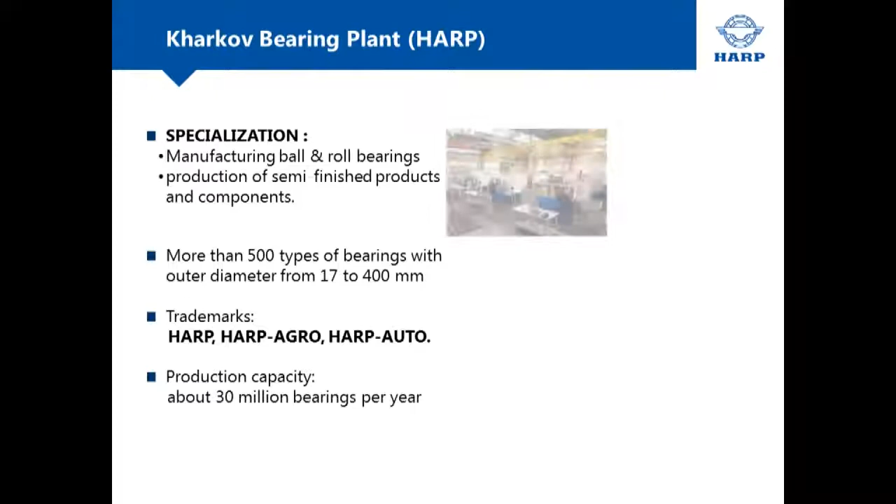Kharkov Bearing Plant, formerly GPZ-8, is the CIS leader in manufacture of bearings for agricultural machinery building companies and a key supplier of railway bearings and bearing units. HARP is specialized in the production of ball bearings and roller bearings, semi-finished parts and components.

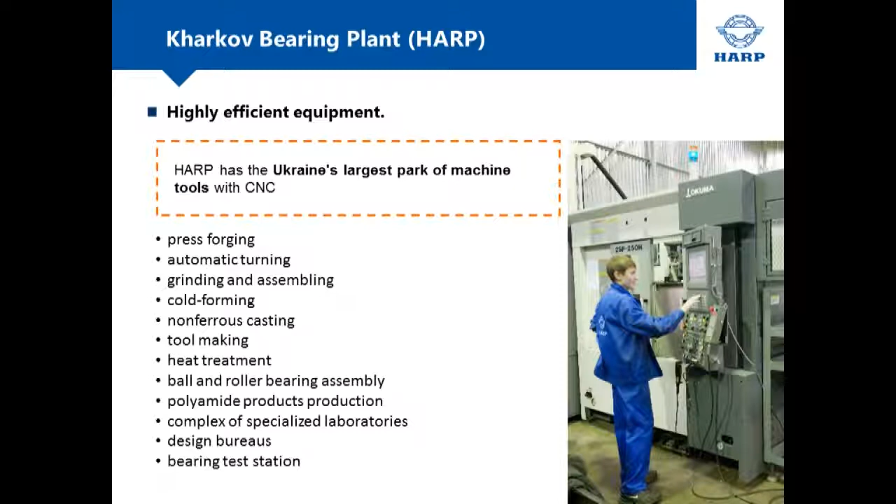The plant manufactures products under the HARP, HARP Agro, HARP Auto, HARP Agri Unit trademarks. All products of Kharkov Bearing Plant are manufactured on domestic and imported high-precision equipment. Moreover, HARP has the largest park of computer numerical control machines in Ukraine. You can find more information about machinery and manufacturing facilities of HARP in the video about our company.

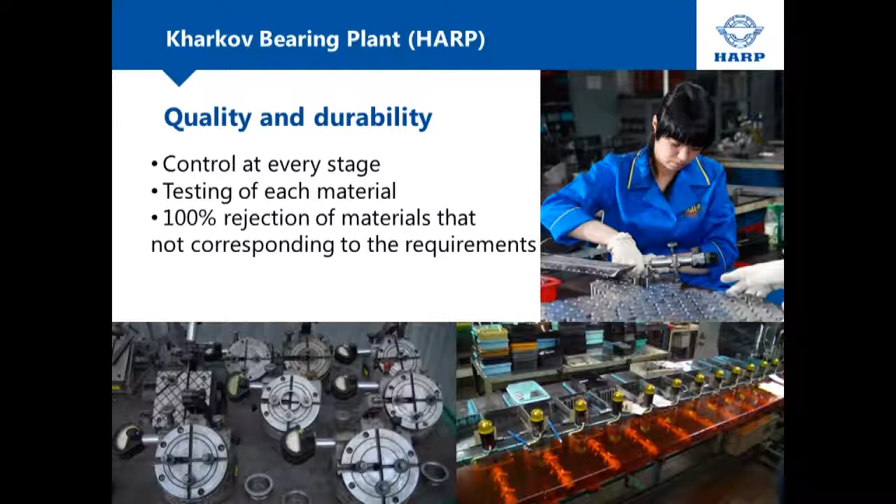High quality and durability of bearings are provided through a complex of measures. If deviations from relevant standard requirements are detected, the materials are not allowed to be used in production. Output products correspond to the international standard ISO 492 and interstate CIS standard GOST 520.

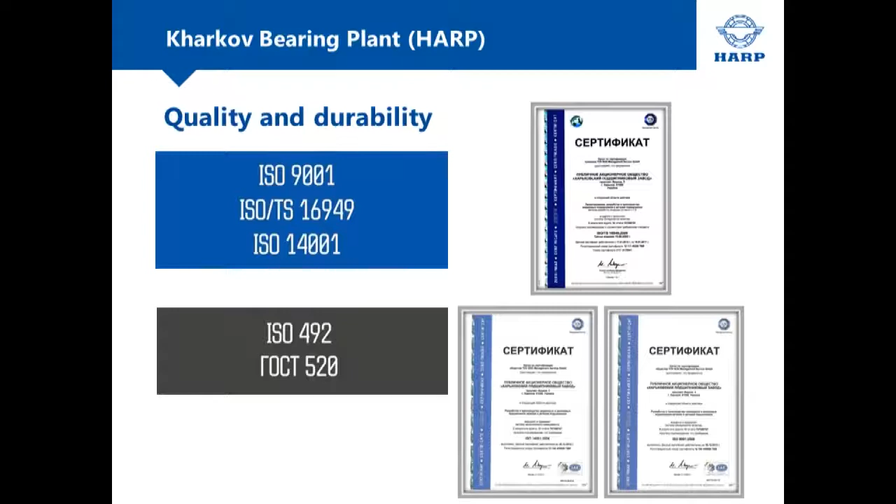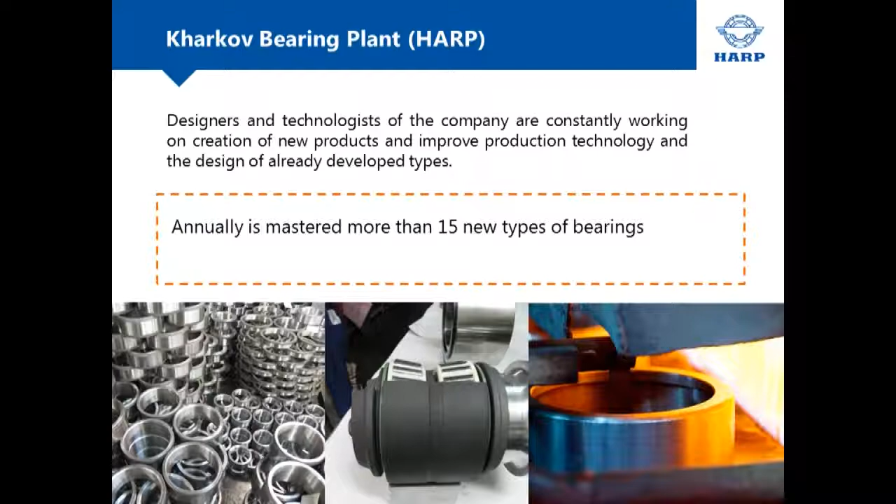Usage of effective seals. At the design stage, we raise requirements for bearing structure compared to normal accuracy class. For HARP bearings, we use ultra-pure steel with a reduced oxygen content share. The design with an optimized raceway radius has dynamic load capacity increased by 5% compared to the standard version, as well as durability increased by 16%.

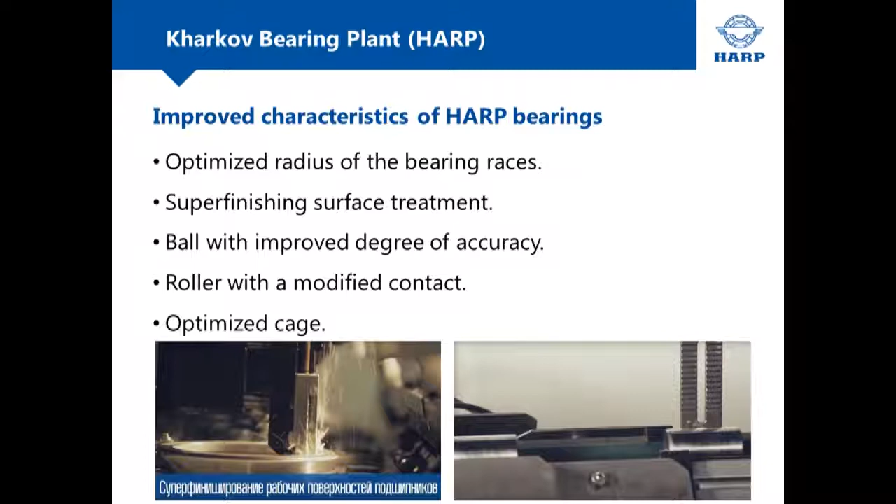Superfinishing surface treatment improves noise and vibroacoustic characteristics and increases durability. HARP bearings use balls with accuracy from 5 to 16 degrees. In HARP roller bearings, a cambered roller with a modified contact is applied, which improves bearing operational characteristics. Along with steel-stamped cages, HARP bearings also use massive polyamide and brass cages, which allow minimizing noise and vibration and increase bearing speed capability.

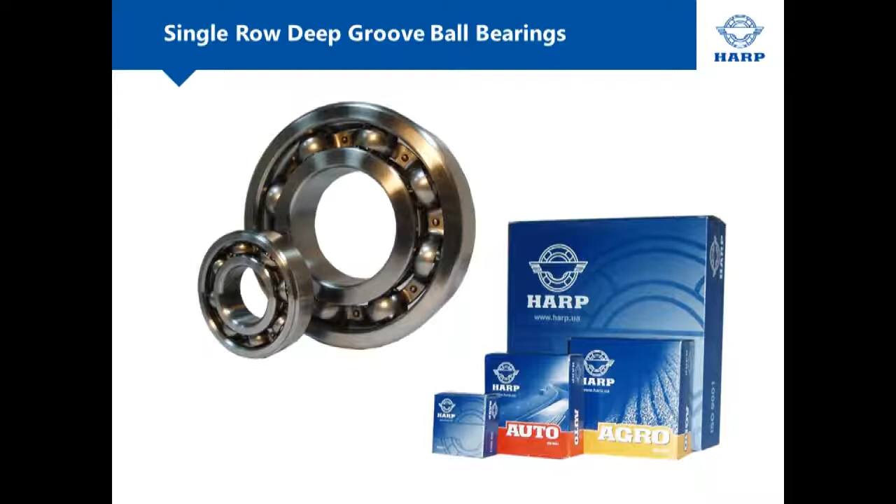Single-row deep-groove ball bearings are intended for operation under radial loads. They also accommodate axial and combined loads, especially with increased radial clearances. The number of structural varieties of these bearings is large enough, and most of them are standardized. To simplify the axial mounting of bearings, they can be manufactured with a groove on the outer ring, in which an adjustment spring ring is inserted during assembly. Design of separators of deep-groove ball bearings is also diversified.

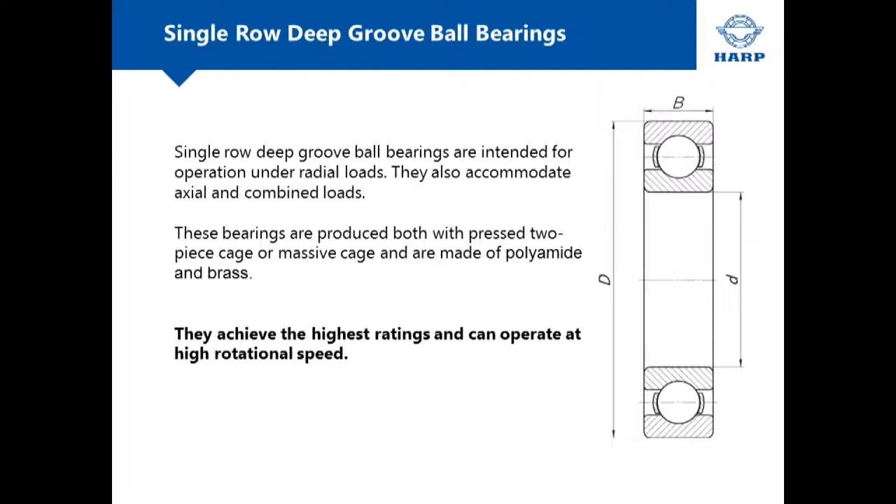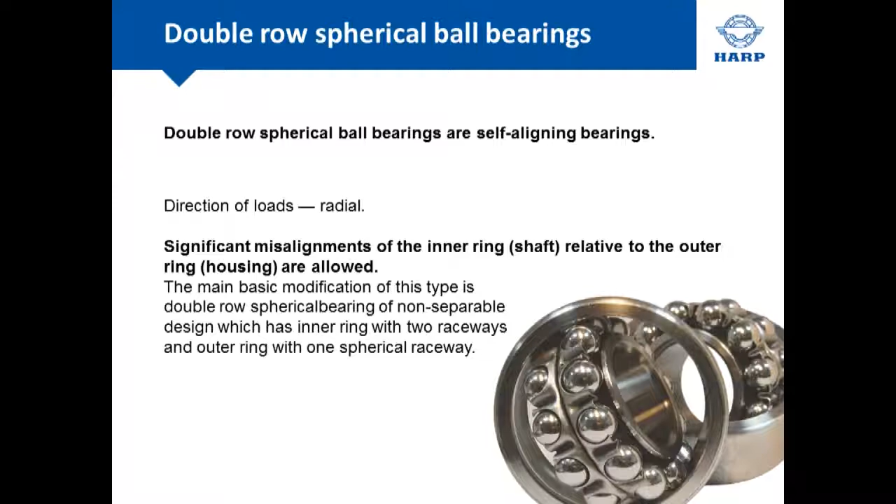Double-row deep-groove spherical ball bearings are intended for operation under radial and minor axial loads. Bearings fix the position of the shaft axially in both directions. Constructively, they consist of two rows of balls, the inner ring with two raceways, and the outer ring with one spherical raceway that allows the inner ring with a set of balls to rotate around the bearing center, that is self-adjusting. This ability allows them to be used at significant non-axiality of mounting seats and large deflections of the shafts. Depending on bearing series, the misalignment of axes may be in the range from 2 to 3 degrees.

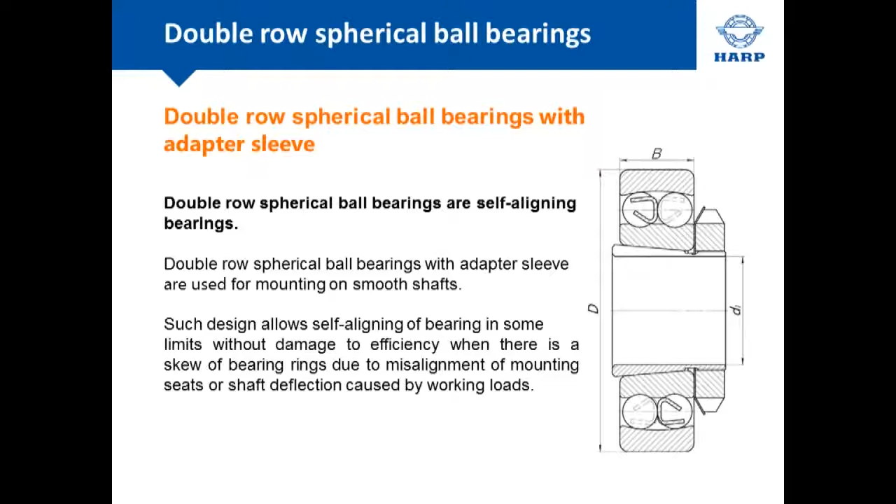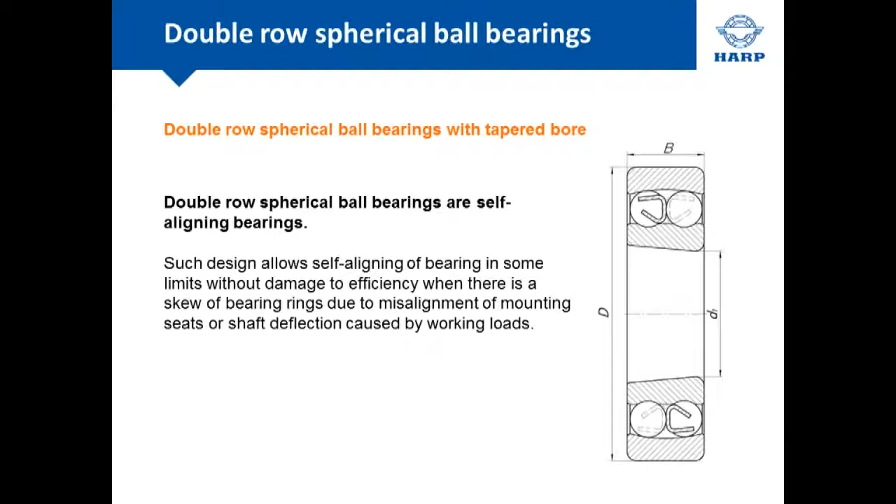Bearings could have cylindrical or conical bore of the inner ring. Bearings with conical bore packaged with adapter sleeves allow possibility of mounting on smooth shafts without fillets. Separators of spherical ball bearings are usually steel-stamped, but some types of bearings produced by HARP are equipped with polyamide ones.

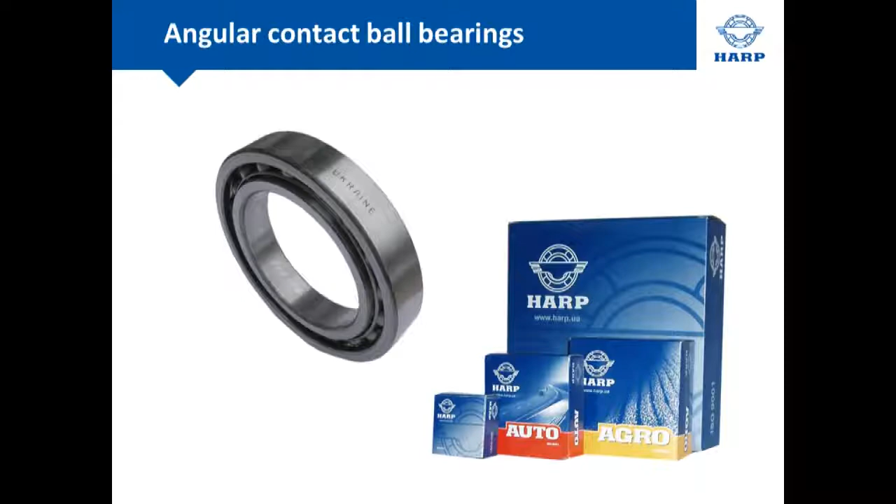Their axial load capacity depends on the contact angle. Angular contact bearings with 3- and 4-point contact can take axial loads in both directions. These bearings are mostly used at medium and high rotational speed. Angular contact ball bearings, which take only one-sided axial loads, require mounting of another bearing, fixing the shaft in the opposite direction.

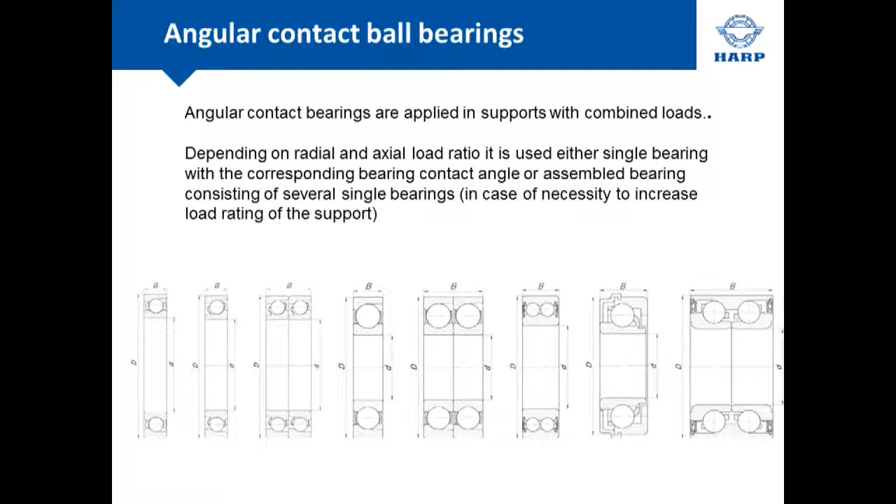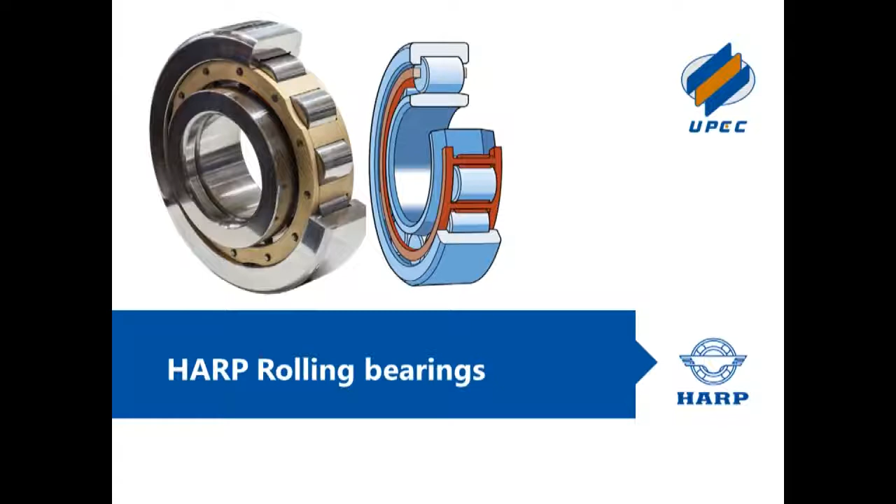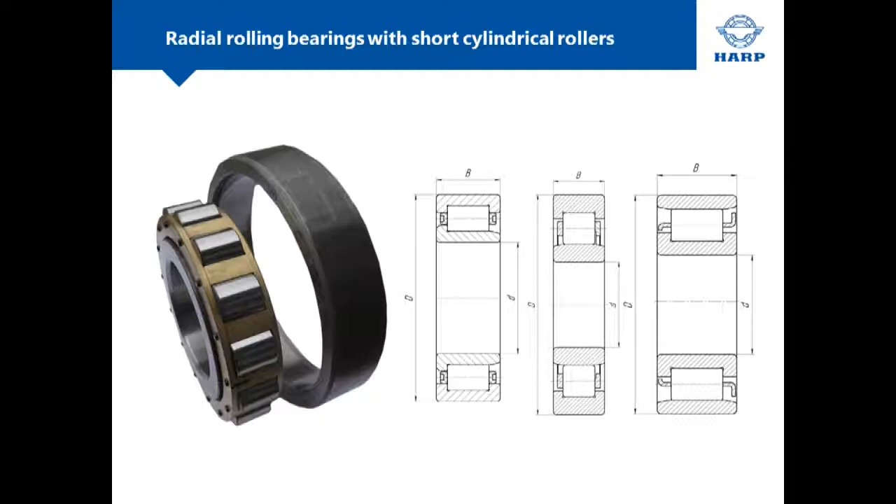Roller bearings. HARP is the only manufacturer in Ukraine and one of the largest in the CIS of cylindrical roller bearings with short rollers. Cylindrical roller bearings with short rollers are intended for operation under heavy radial loads. Their high rapidity is almost equal to single-row deep groove ball bearings. They require precise alignment of mounting faces. These bearings are used for mining and metallurgical complexes, for material handling equipment.

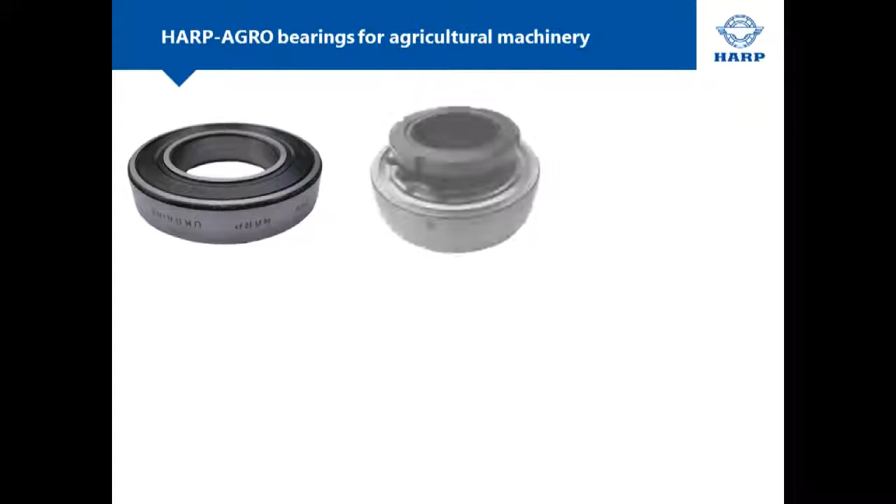HARP agro bearings for agricultural machinery. A special place in the product range of Kharkov Bearing Plant is occupied by bearings for agricultural machinery, as the plant was built for the needs of agricultural machinery. For more than 60 years, HARP has manufactured its products for farmers from the former Soviet Union region.

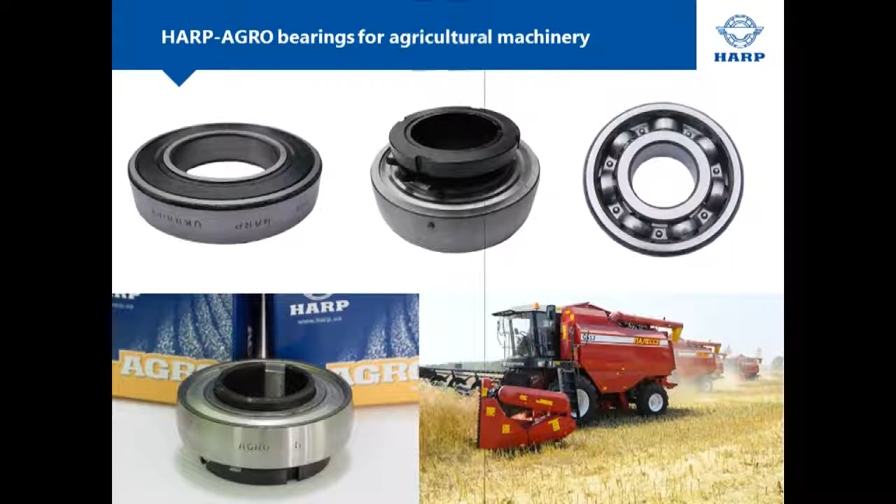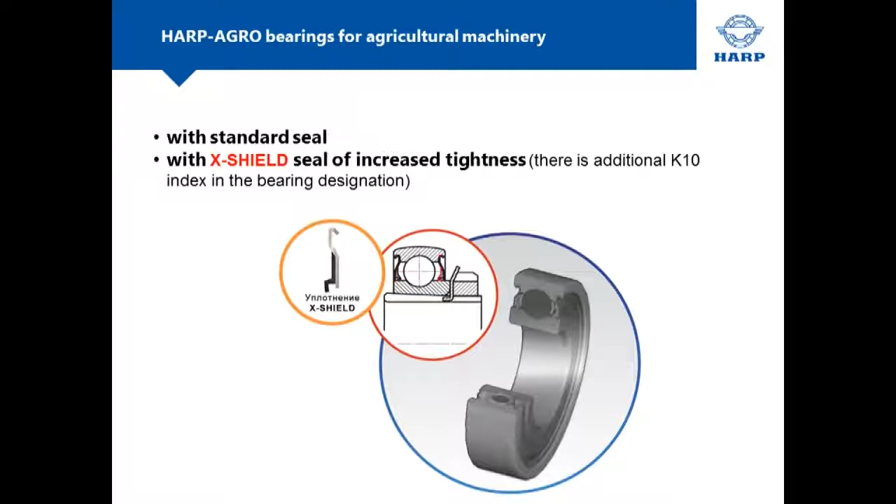HARP agro bearings for agricultural machinery can be produced with a locking pin to avoid rotation of the bearing in the housing. Both with standard seal and tight seal, which allows bearings to contact the dust environment and operate efficiently in extreme operating conditions of agricultural machinery. Both with standard stamped steel cages and polyamide cages.

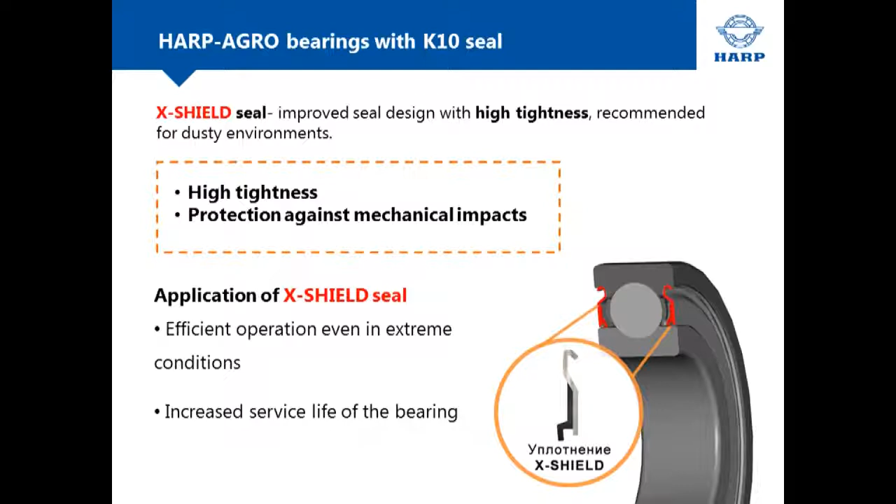We should also pay attention to bearings with seals of increased tightness K10. It's no secret that the majority of agricultural machinery work in severe environments with dust, dirt and moisture. Therefore, bearings for combine harvesters and tractors, in comparison with other machines, shall have a higher tightness. The outer side of seal K10 is metal, so in the operation of a combine harvester, the straw mass cannot damage the seal or fall into the inner bearing cavity and interfere with its normal operation.

HARP agro bearings today are highly appreciated by leading manufacturers of agricultural machinery in the CIS, including Rostselmash, Gomselmash, Bobruisk plant of tractor parts and units, Minsk tractor plant, and Borisov plant of aggregates.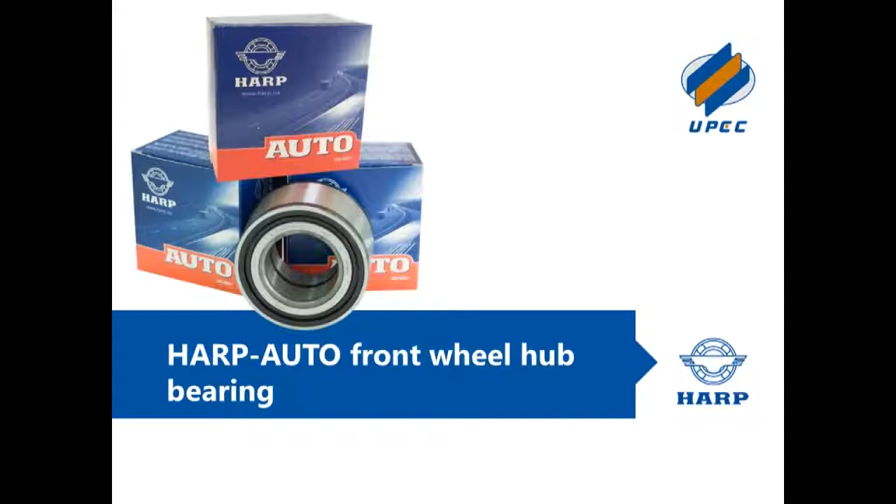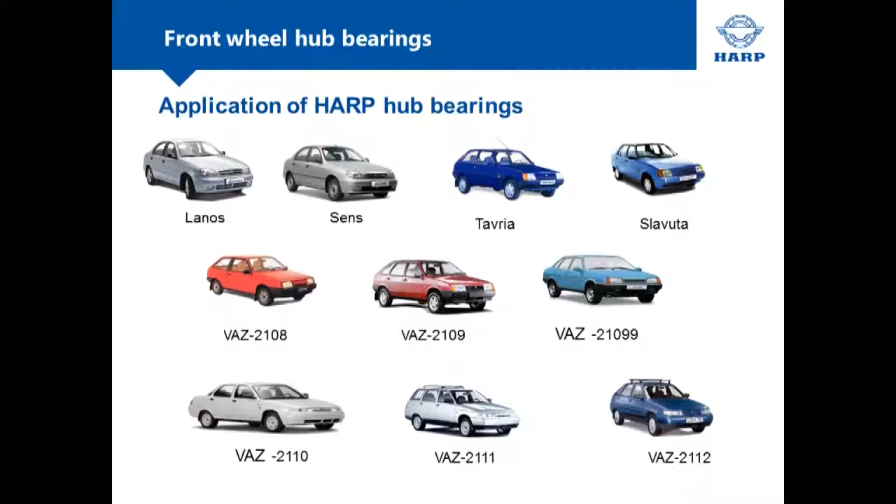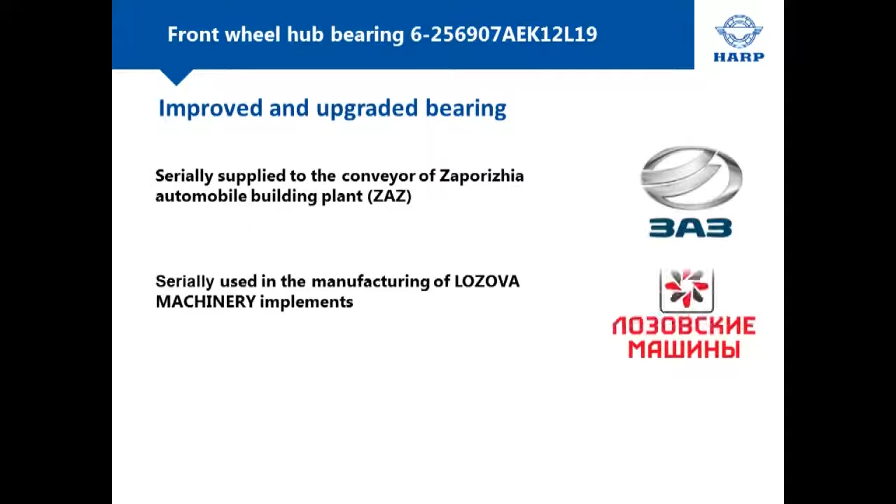Front wheel hub bearing HARP Auto. Kharkov Bearing Plant is one of the main suppliers of bearing products for the conveyor of joint stock company ZAZ. Since 2011 we have been supplying modernized front-wheel hub bearings for cars such as Lanos, Sens, Tavria, Slavuta, and Vaz. The upgraded hub bearing is successfully used in manufacturing agricultural implements, in the maintenance-free bearing unit HARP Agro Unit for disc harrows and cultivators.

Designation of the modernized bearing is 6256907 AEK12L19. This bearing has significantly improved characteristics on durability and efficiency, compared with 6256907 AE1K1C17, earlier serially produced.

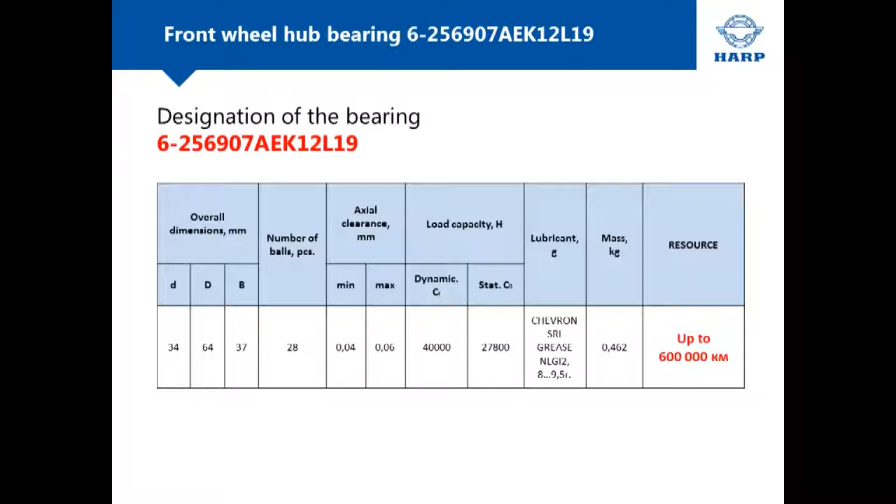Improved characteristics on durability and efficiency of the upgraded bearing 6256907 AEK12L19 are achieved by means of production of bearing rings from hot-forged billets. Usage of the upgraded hub bearing 6256907 AEK12L19 allows increase of durability, increase of tightness, reduction of the level of vibration and noise, and increase of the speed characteristics of the product.

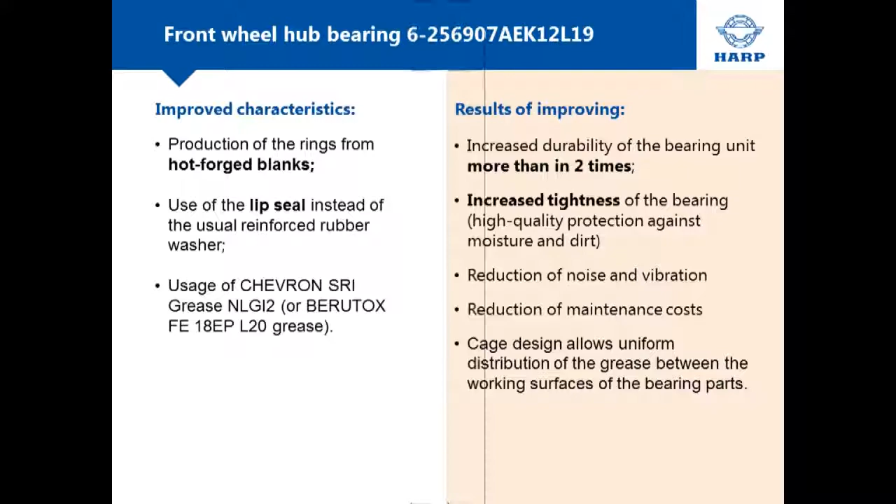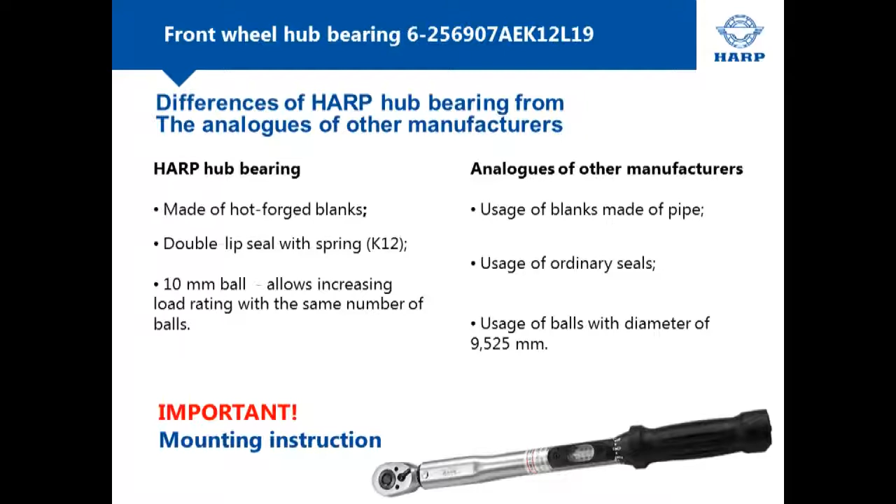The difference between hub bearings and the products of other manufacturers: please know that during mounting of hub bearing, the operating instructions should be strictly fulfilled. It is necessary to use special tools, strictly observe the tightness of the nuts, and use a torque wrench.

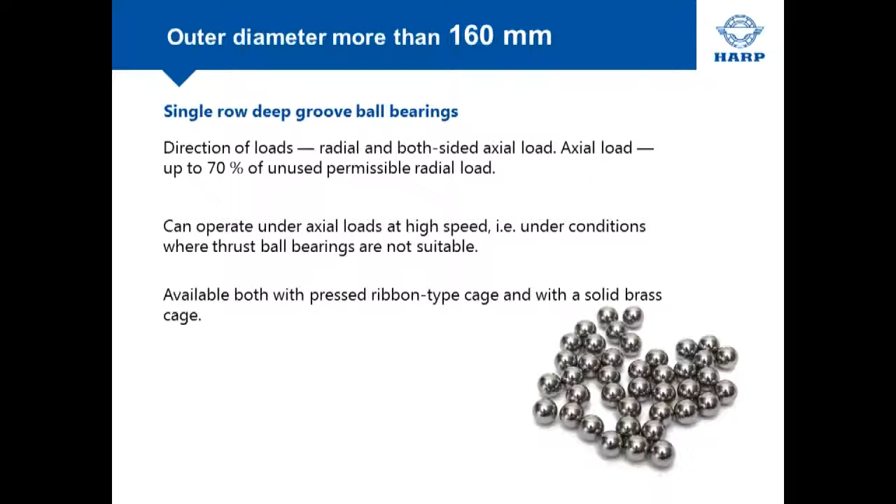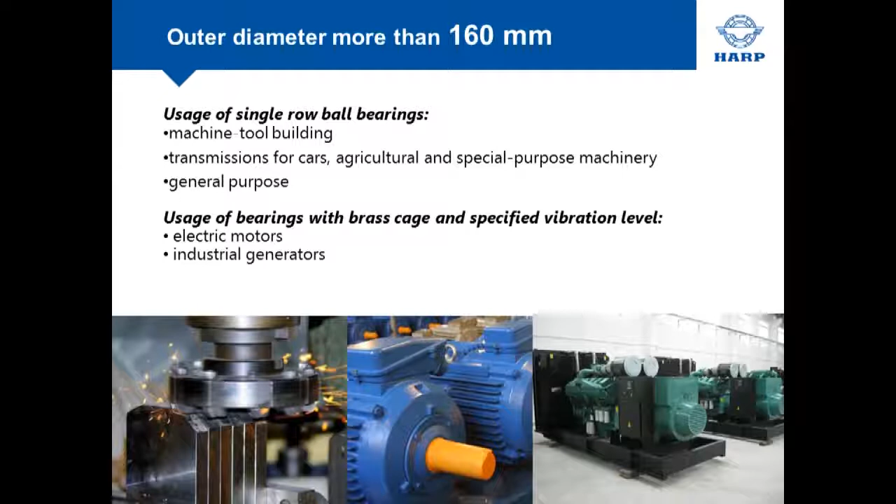The types of bearings implemented from 2010 to 2014. From 2010 to 2014, lots of popular bearings were designed and launched into mass production at Kharkov Bearing Plant. For example, single-row deep groove ball bearings with outer diameter more than 160 mm. Areas of application of these bearings are machine tools industry, transmissions for auto and agricultural industries, special equipment, and general industrial usage, including application of bearings with brass separator in defined vibration level, electric motors and industrial generators.

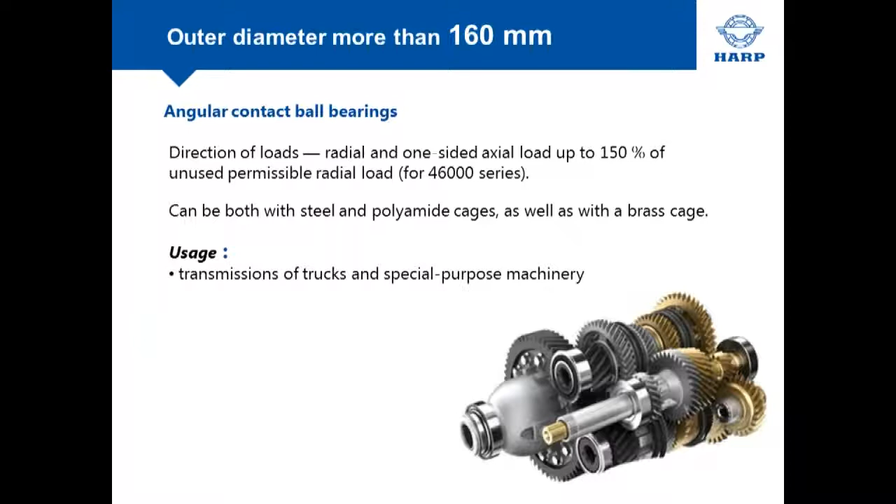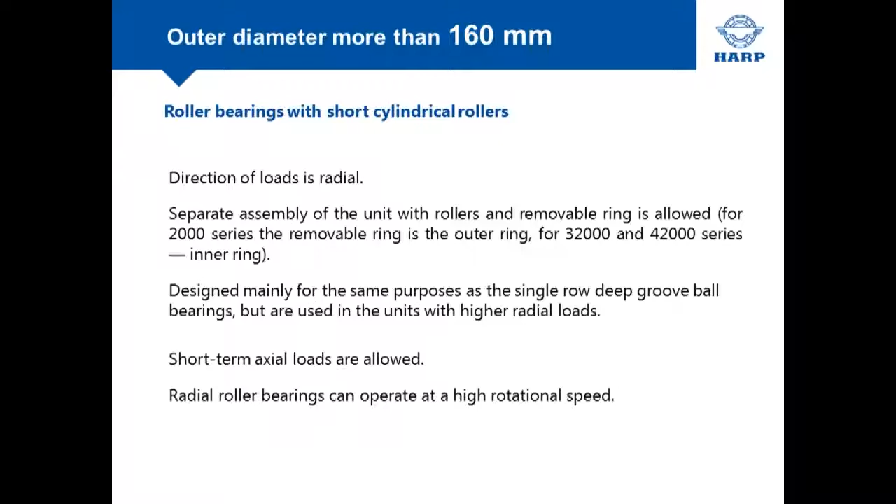Angular contact ball bearings with outer diameter more than 160 mm are used in transmissions of trucks and special machinery. Cylindrical roller bearings with short rollers with outer diameter more than 160 mm: the direction of bearing loads is radial, while short-term axial loads are also allowed. Areas of application of these bearings are mining and metallurgical complexes and lift and carry handling equipment.

Radial single-row ball bearings with outer diameter more than 160 mm are used in the automotive industry in speed change boxes and in general engineering. Bearings are manufactured both with raceway on the outer ring and raceway on the inner ring, with one shield.

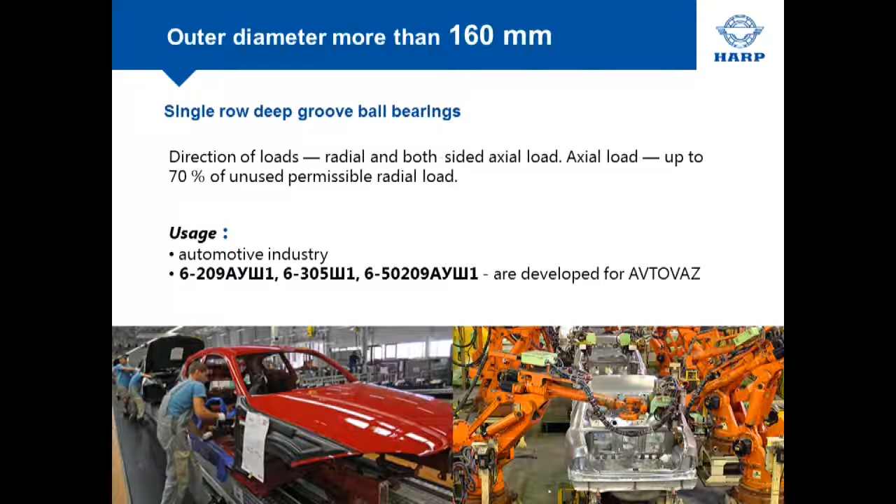Radial single-row ball bearings with two shields. Application of this bearing simplifies the unit design, as it's not necessary to provide lubrication into the bearing, and it eliminates the need for maintenance during operation.

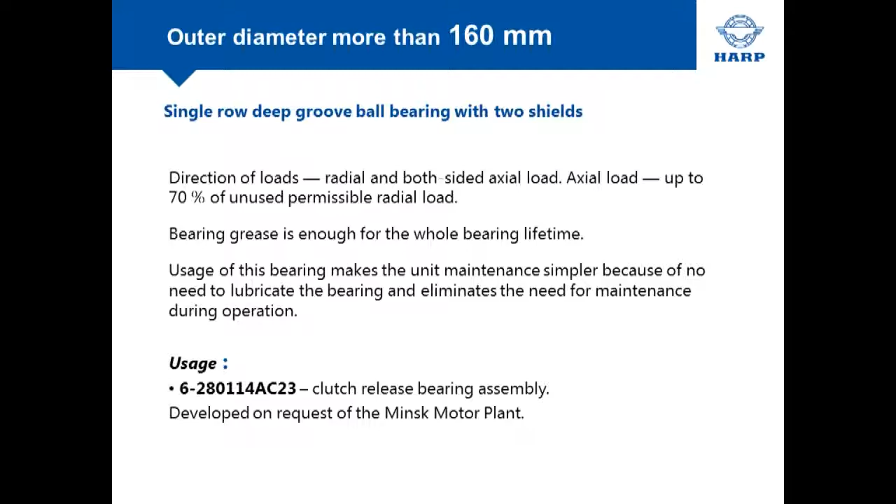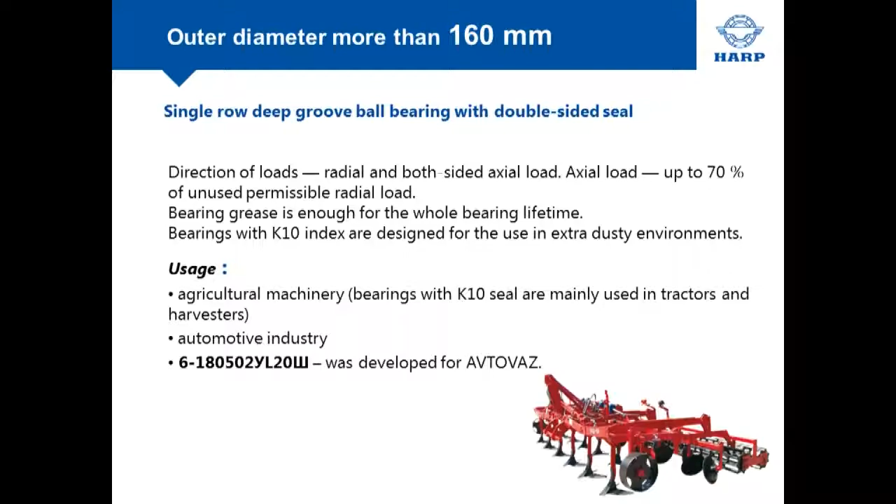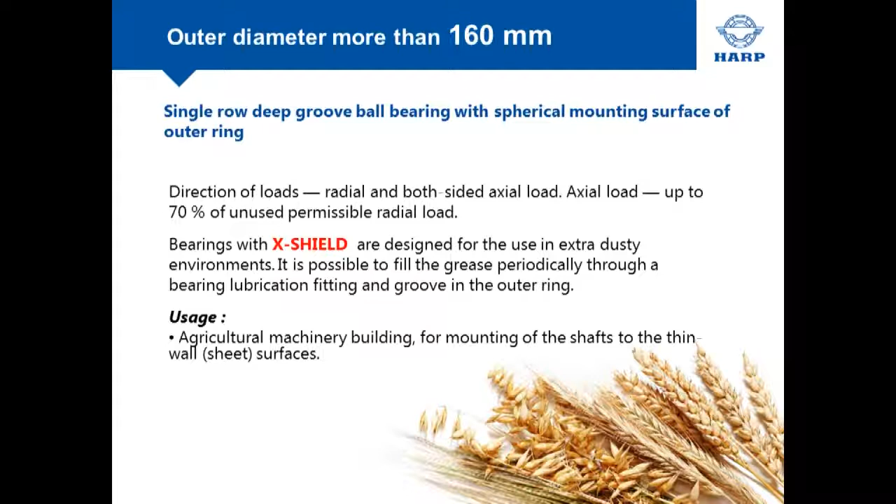Radial single-row ball bearings with double sealing are used in agricultural machinery and in automotive industry. Radial single-row ball bearings with spherical mounting surface of the outer ring with seals are mainly produced with K10 index and are designed for usage in very dusty environments. There is a possibility of periodic replenishment of lubricant through the lubricator and the channel in the bearing outer ring.

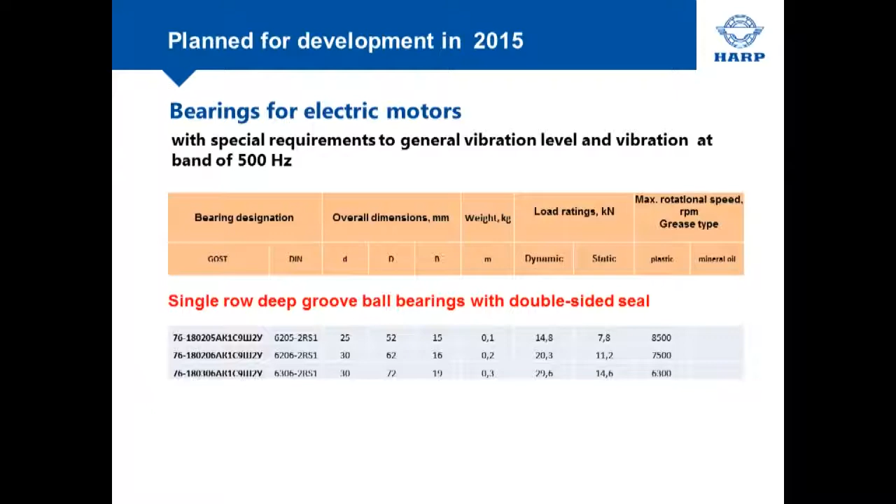Within the current work of the enterprise in 2015-2016, new types of bearings are constantly developed. They can be designed by our construction bureau as well as together with designers of other manufacturers. This includes bearings for application in electric motors with special requirements to the total vibration level and the vibration level in the band 500 Hz, and bearings for applications in the units of agricultural equipment with K10 seal or increased tightness.

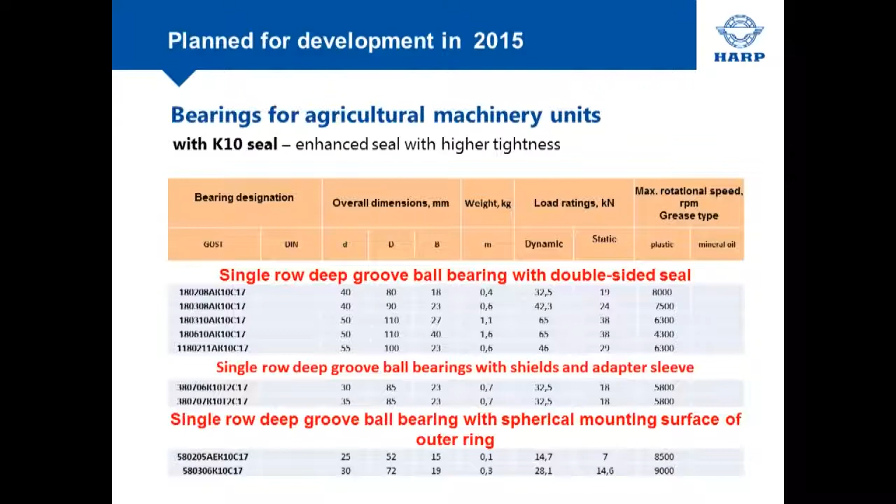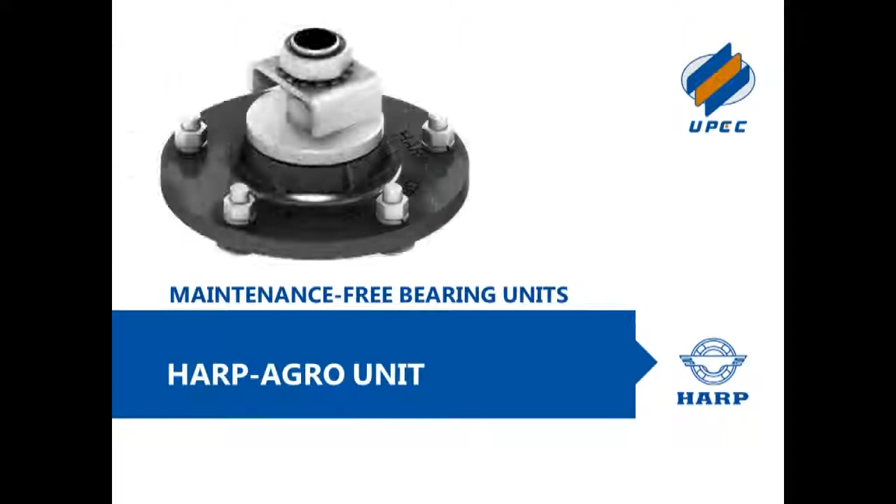Rear wheel HARP bearing for VAZ automobiles with a higher service life up to 600,000 kilometers. Bearings for automotive transport, development for GAZ automobiles. Maintenance-free repairable HARP Agro units for tillage equipment.

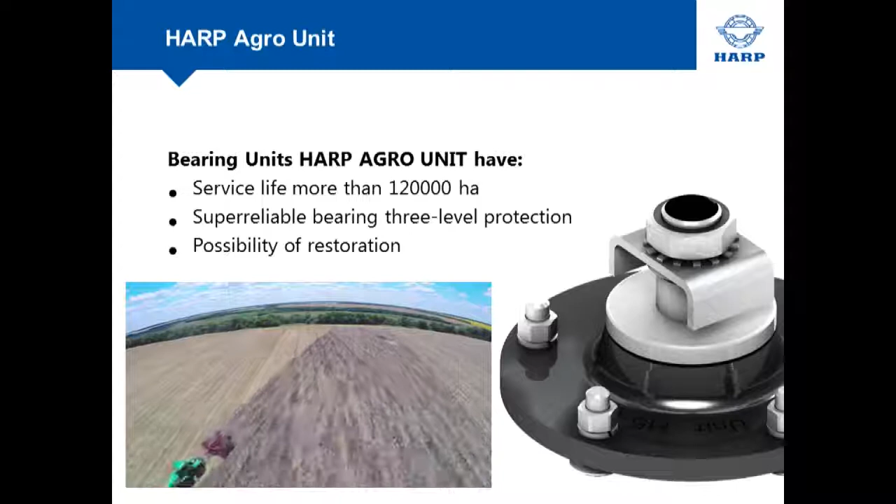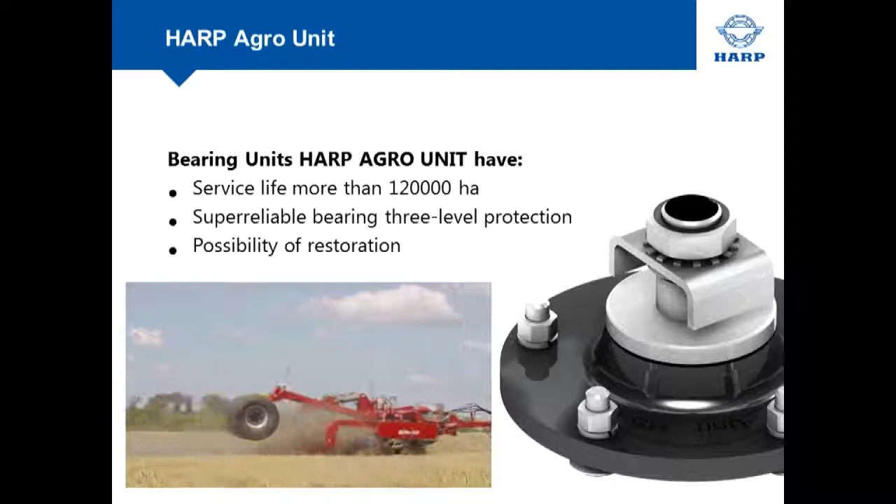Advantages of HARP Agro unit: increased service life, more than 120,000 hectares. Ultra-reliable 3-level protection of the bearing. Cassette bearing with high-quality lubricant that does not require additional lubrication throughout the life cycle. The possibility of restoration, including the replacement of bearings without replacing the housing, in a conventional workshop. Quick installation and removal, which reduces equipment downtime. Trouble-free operation over a long period.

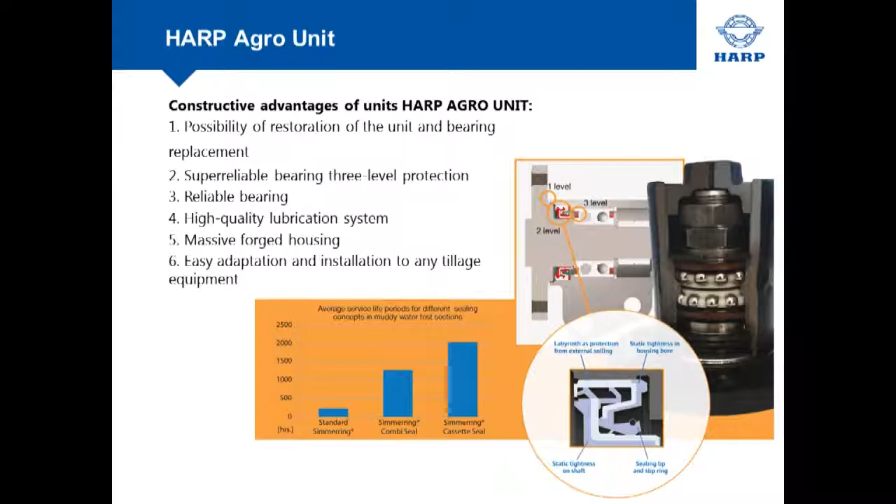Design advantages of HARP Agro Unit: possibility of unit restoration and bearing replacement. A distinctive feature of HARP Agro Unit is the possibility of bearing replacement at any desired time of operation without replacing the housing. After the end of bearing service life, it can be replaced in a conventional workshop, and the unit is again ready for operation.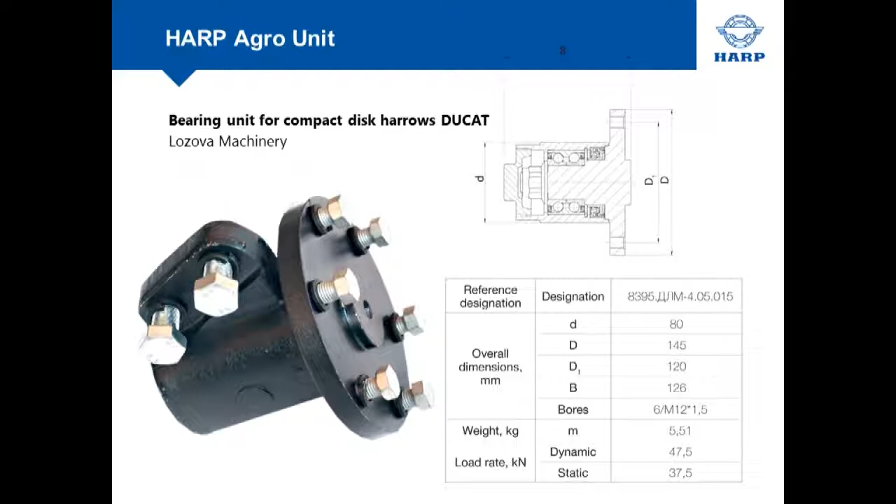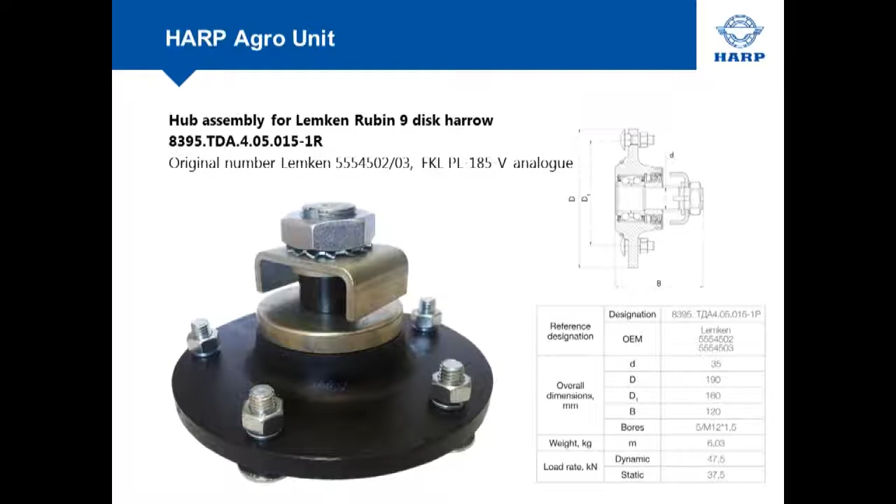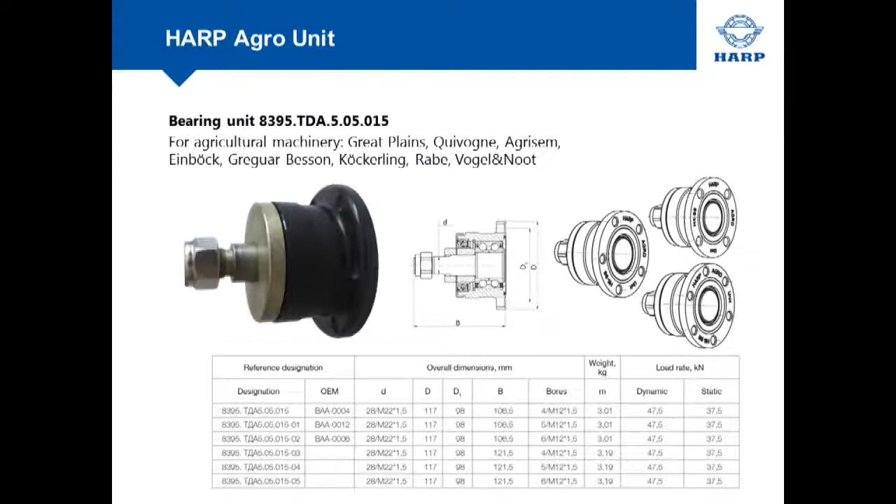Reliable bearing: inside the unit there is a bearing manufactured by HARP, one of the most reliable bearings, proven by decades of experience in the most loaded machines. Quality lubrication system: in the unit there are 3 types of lubricants, each maximally adapted to its friction pairs with an optimal compromise between the requirements to ensure durability on one hand and reduction of hydraulic and mechanical losses on the other.

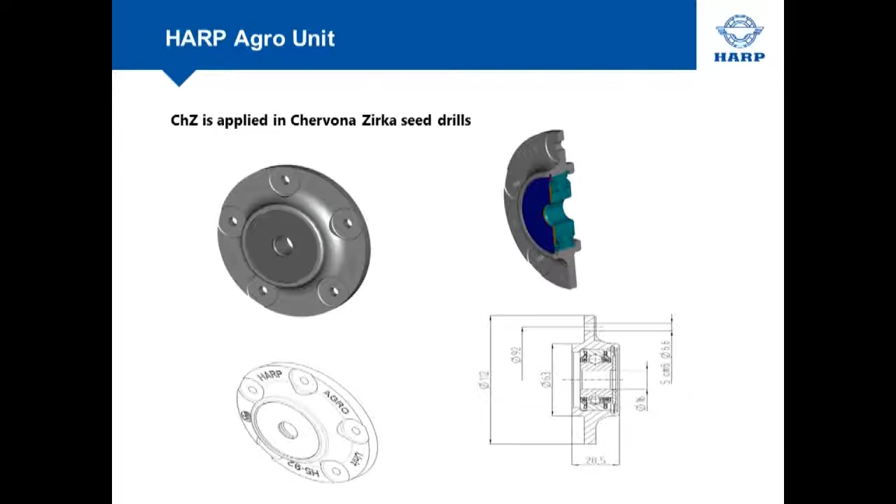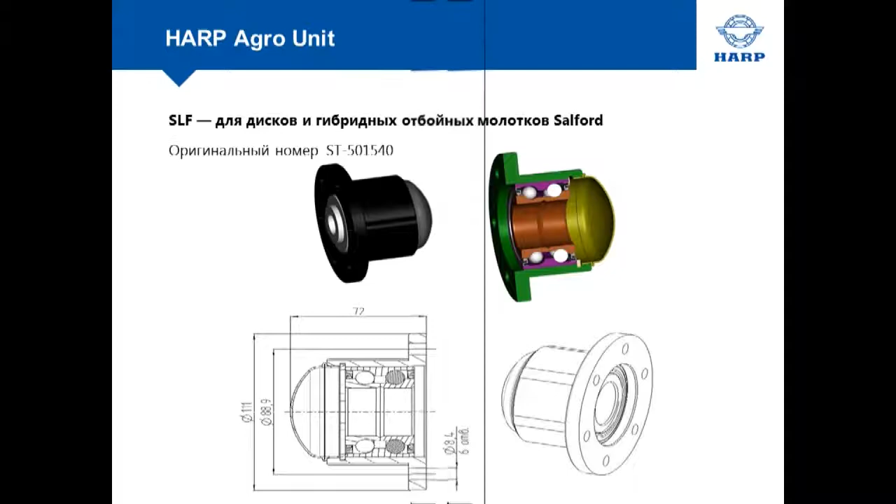Massive die-forged housing: well-established technologies of forging and tempering considerably increase the durability of the rubbing metal layers, provide high strength and reliability, and maximum durability under any conditions of operation. Easy adaptation and installation to any implement. HARP Plant is an innovative engineering company that focuses on improving product development.